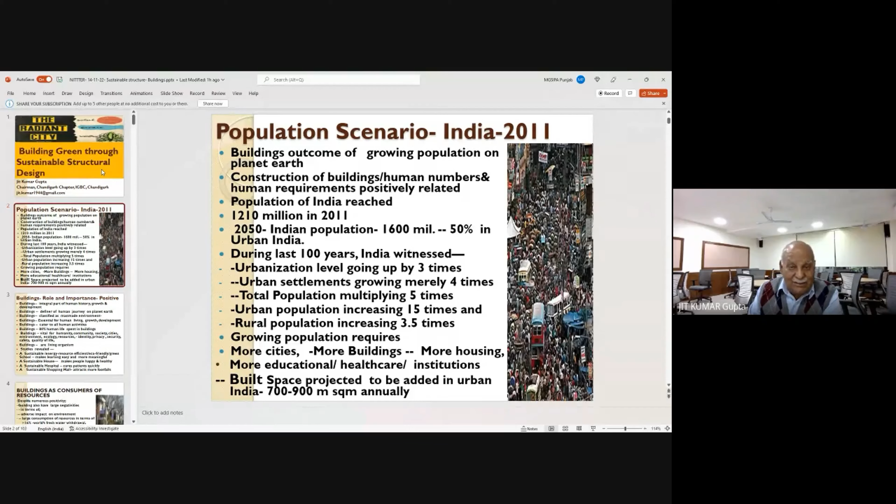But I think we have to understand, before I go back to the buildings, we have to understand the context of the building. So please understand, buildings are different. Buildings are distinct, buildings are universal, and buildings have a lot of impact and implication for human beings.

The day we came on this planet Earth, about 5 lakh years ago, the first thing we did was start searching for our shelter. So the kind of buildings have changed over a period of time with our requirements, with our technical know-how, with our knowledge of material, with our technology of construction, and our changing needs of living, working, and other measures which we are required to take.

So if you see our history, you are defined by the building itself. All the civilizations which came on this earth - Indus Valley civilization, Greek civilization - they are all being defined by building. Tomorrow, when the next generation looks back at history, they will all be looking at how we were living, and they will all be defined by the building. So buildings remain very critical for human living, growth and development.

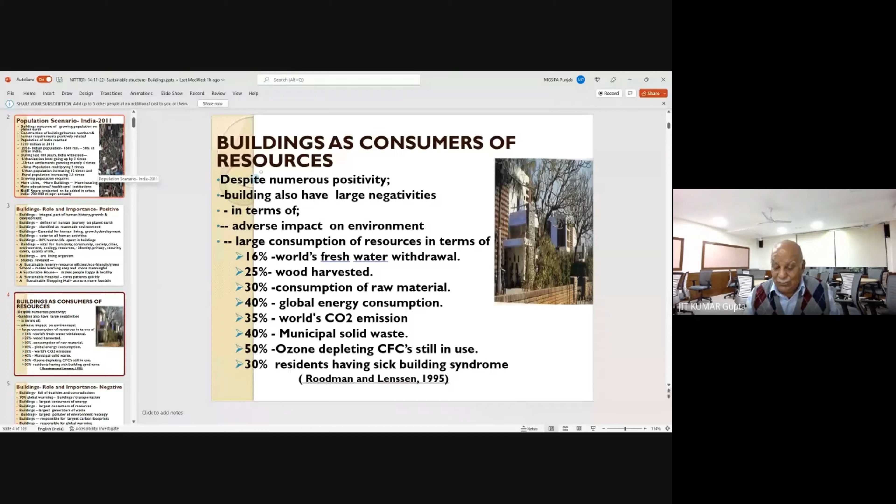They are suffering from the phenomenon of sick building syndrome. What is sick building syndrome? Buildings make you sick, buildings make you healthy - provided if you are living in a bad building, a badly designed building, without air, light and ventilation, and all kinds of problems like bacteria, you become sick. But if you have proper lighting, ventilation, and indoor air quality where the carbon emissions are the lowest, you surely are in a better kind of environment.

So you will be happy and healthy.

When we cumulatively analyze the building, from those two slides you can make out buildings are full of dualities and contradictions. 70% of global warming can be attributed to buildings and transportation. Buildings remain the larger consumer of energy and resources, generator of waste, and polluter of environment and ecology, and they generate carbon footprints. If you're heading for a problem of global warming, one of the major contributors remains the building itself.

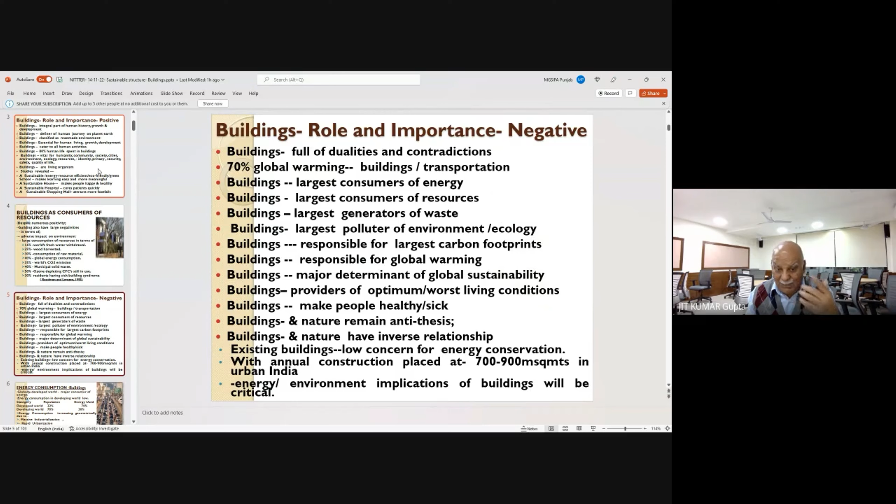Buildings remain relevant for human living. They can make you sick and make you healthy. But please understand, I'm repeating, building and nature remain antithesis to one another. So all building is an act against nature. I think our role and responsibility shall be how to minimize those conflicts. What conflict am I referring to? They consume lots of water, wood, raw material, energy, and they emit this. If you can minimize these things, I think you have done your job.

When you look at energy consumption globally, a majority of energy is consumed by the developed world. A Chinese person consumes 3.5 times more energy than us. An American consumes 11 times more energy, and as Indians, we have also started consuming large energy. They say energy consumption is an indication of the prosperity, growth, and development of a nation, and the reason for this energy consumption shall be industrialization, urbanization, prosperity, and globalization.

But I tell you, energy shall remain the motive force. Energy will be required, energy will be essential. You cannot cut down the energy. Energy need will be rising. But the problem will be what energy you use.

So energy has a color. You have black energy and you have green energy. Black energy is any energy generated by thermal plants where you are burning coal. You're generating carbon dioxide, you're transporting coal all the time. Around 60% of the total energy in India is generated by thermal plants, burning coal away. Thousands of tons of coal are burnt every minute, and when you burn coal, surely you are emitting carbon dioxide. But the question remains—I'm not saying you stop or the world will stop using energy.

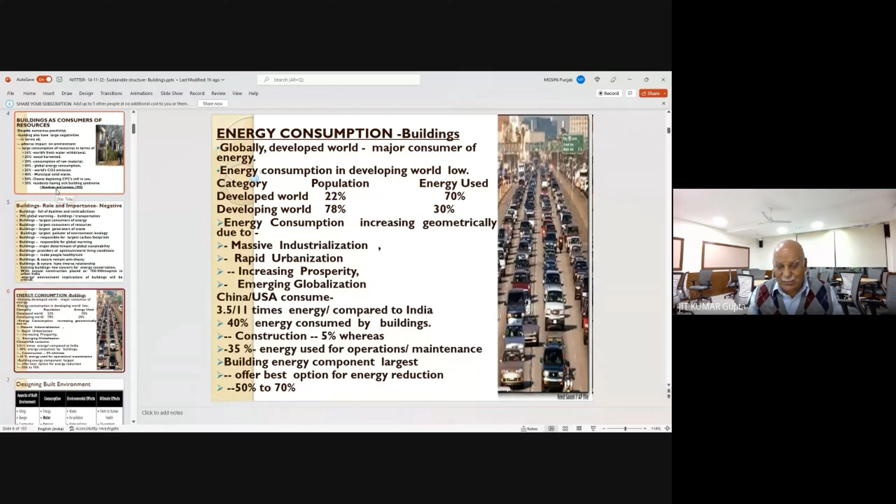So whenever you have a problem, please don't go out and look outside. Wherever there is a problem, the solution lies there itself. If buildings are consumers of energy, buildings can be made more energy efficient. So building remains the focus, and therefore buildings offer the best option for how we can reduce energy consumption.

When I look cumulatively at the context of the building, you can define the total life cycle of a building into 7 stages—that's siting, design, construction, operation, maintenance, renovation, deconstruction, and reconstruction, that's the 8th one. During this entire cycle, what do buildings do? They consume energy, water, material, and natural resources. Ultimately, they generate waste, pollute air, water, indoor air, create heat islands, and there's flooding and noise.

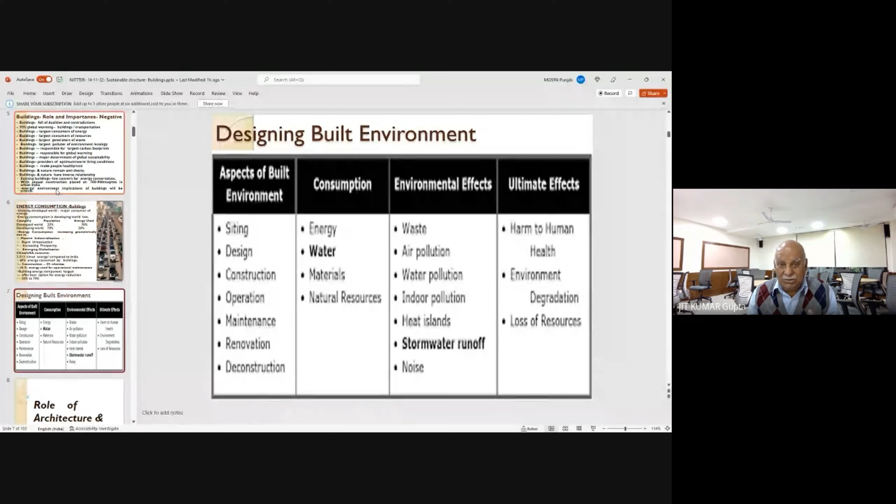Ultimately, what is the impact? They are harming human health, they are degrading the environment, and wasting a lot of resources. So you can think of this as the building—what they consume and what their implications are on the environmental effect.

So we look at who are the major actors in the building itself - building construction, building designing, building operation and building maintenance, so we focus on that. When I said if the building life cycle remain eightfold, there are two major actors: architects, structural engineers, civil engineers, and their service providers. All of them are very vital. Of course there is an owner, a person who is using it, they are there too, but surely for creation of the building, we are the people who are actively involved.

When we look at the entire context of building, I would draw your attention to the man Vitruvius. He was a Roman, he was an engineer. He is known as the father of architecture because he was the first man to write a treatise in architecture, identifying what the characteristics of a good building should be. And he gave the 3 characters: Firmitas, Utilitas, and Venustas.

Firmitas means building should be structurally stable - look at this, this is the job of engineering. Utilitas, building to be used for occupant, owner, and community - this involves both architecture and engineering. And then building should be aesthetically pleasing, beautiful to look at - that is Venustas. So beauty, utility, and structure - he defined there are 3 components of a good building, and all buildings should be designed with these 3 parameters in mind. That was defined more than 2,000 years ago by this gentleman, Vitruvius, who is called the father of architecture.

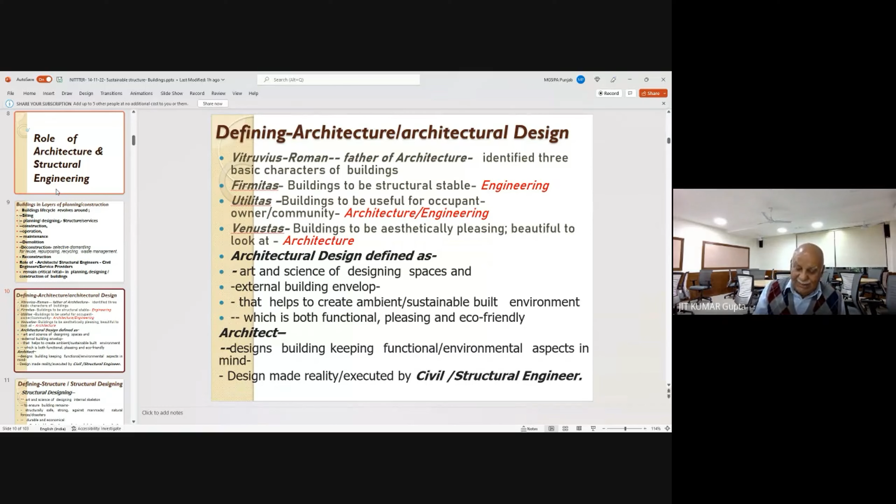But this concept on the paper, when it is transformed into reality, who will do it? It's only the structural engineer and the civil engineer. Let me also define it - I know you are more knowledgeable about structural design, but nevertheless, for my education, I would also like to define what structural engineer is. This is defined differently and distinctly. As architecture was the art and science of defining spaces considering the utility, aesthetic, environment, and function for which the building was designed,

But the question remains, are you looking at the durability? Are you looking at resources? Are you looking at the economy of the building? Because you have to make sure buildings consume energy, and the factor of safety will determine whether these buildings are economical. Of course they will become durable, but all structural design has to be between two limits - that means you achieve this desired level of safety, Firmitas, to the building, but make sure the building remains most economical.

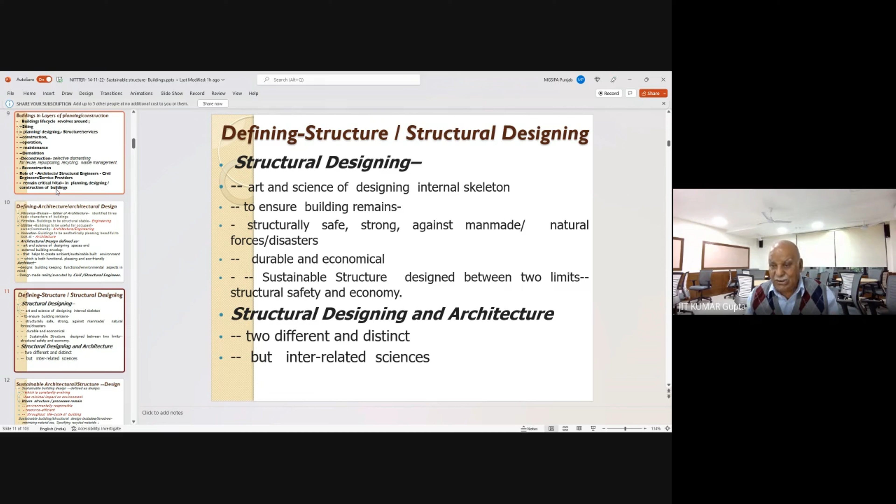Please understand, structural designing is not subservient to architecture. In fact, structural designing remains one of the partners, collaborator, and advisor to the architect, to make sure whatever building is designed is sustainable, more livable, economical, consuming the least amount of energy and resources, and surely has the required level of safety for the people living there.

So ultimately, when we cumulatively look at what is a sustainable building design, please understand there cannot be a universal building design. It will be all evolving, devolving. Structure can never be static. Structure is always evolving and devolving. You have seen how structures have changed over a period of time because of technology, because of material.

The construction technology and methodology of construction have all redefined the building, the design, the structure, etc. So structure in sustainable building design will not be universal, meaning you can't have a prototype of this. You will have the same principle guiding the designing, but they will be contextual to the area, the climate, the place where they are located, the wind direction, landscaping. There are so many other factors, the materials available, the technology being used. I think they have all been relevant, and that's what sustainable building design is — it shall never be static or fixed.

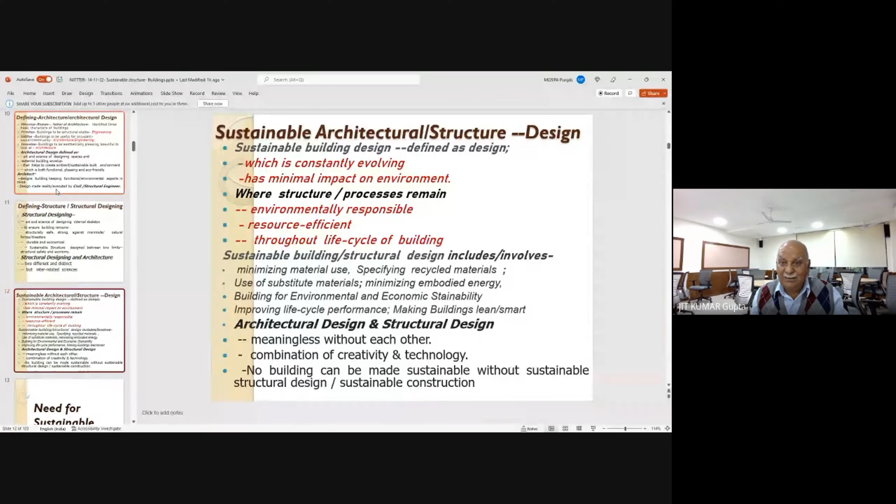If we are aiming at sustainable buildings and design, I think the structural engineer has to do its job. Even if the architect stresses that he wants a building sustainable, if the structural engineer does not address that issue, the building will never achieve the concept of sustainability. So they both remain relevant and meaningful. Sustainable architectural design will combine creativity and technology, and both have to work together to make a sustainable building a reality through structural design.

So let's look back at why sustainable buildings are relevant, and what is the need of sustainable structural design. We said 40% of global carbon emissions and 36% of energy used globally can be attributed to the way buildings are planned, designed, constructed, and operated.

Structural engineers and practices have a role in making a building sustainable, because buildings have impact on environment, ecology, and resources, and they generate a lot of waste. When a large number of buildings are constructed, the implication on resources and waste will be very high, and the impact on climate will be very large.

But the building typology has been changing very rapidly. Earlier buildings were low rise, now they are high rise. Earlier buildings had small spans, now spans are very large. Earlier buildings were very small, now they are very large. This changing typology has been possible because of three things: steel, the elevator which makes you move, and glass, which has helped make these buildings a reality.

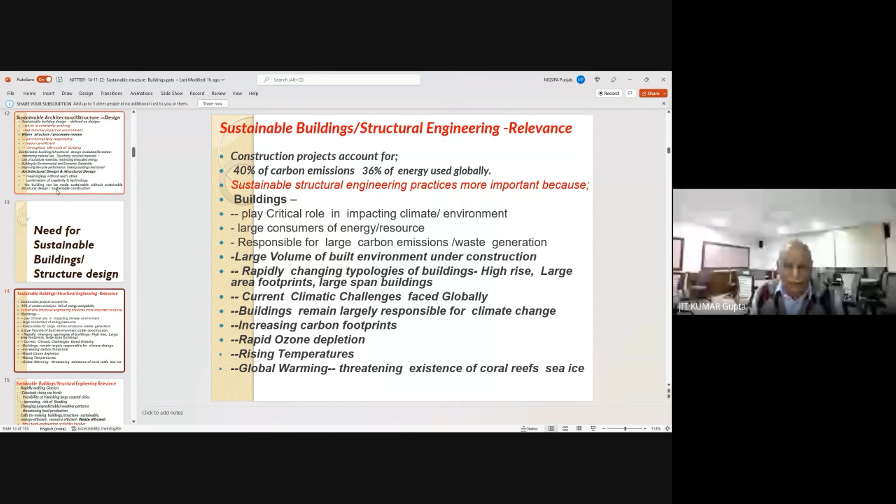Acting on a building, first and foremost you should understand we are destroying, we are converting the natural environment into man-made environment. So a number of wildlife habitats get destroyed.

Building during construction consumes a lot of energy. You are using heavy machinery, burning many things to produce materials, using construction materials which are manufactured through processes. And it's not only during construction, but the building, as a machine, will continue to use energy in its entire life cycle during operation, maintenance, etc. This has implications, and the structural engineer has to address these issues.

When we look at buildings, you have rightly said that the context has been changing. If somebody comes to you and says please design or construct my building, he will always demand three things from you.

Number one, he would say please take minimum time to construct my building. Number two, the quality of the building should be highest. Thirdly, while taking minimum time and ensuring very high quality, please make sure the cost should be less. So cost, quality, and time become the three parameters.

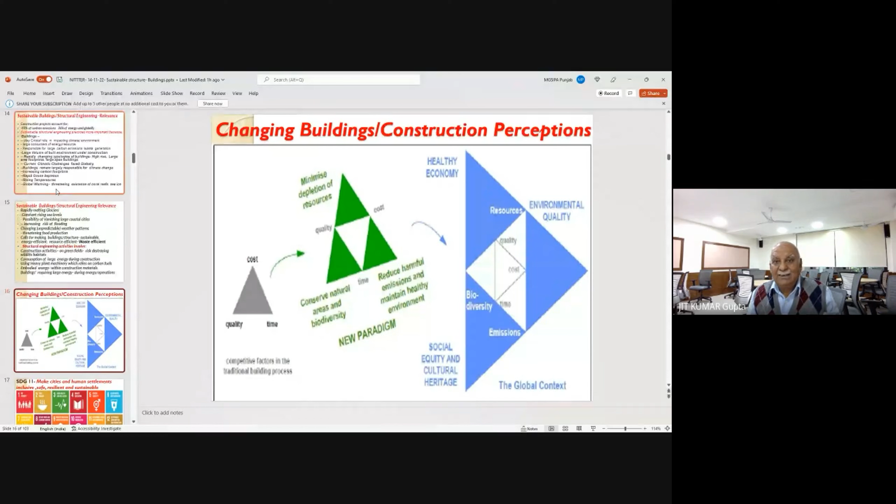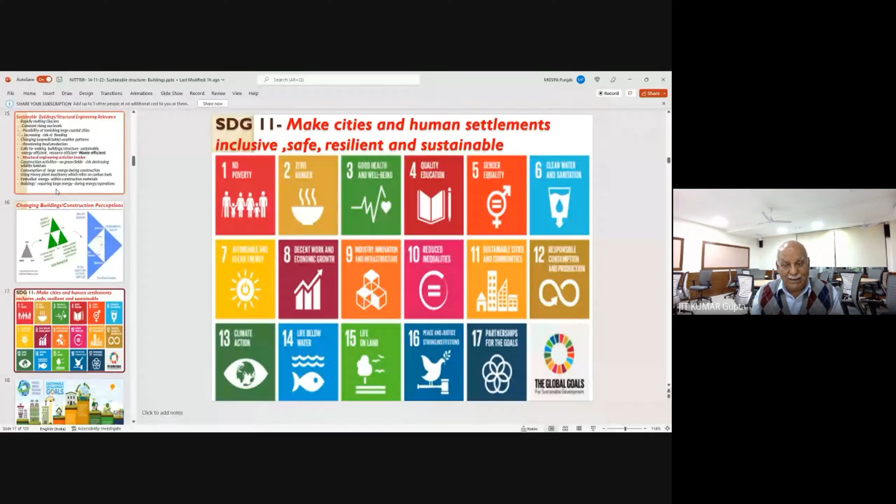Buildings are relevant for global warming and need to be addressed and planned for accordingly. So buildings are now looked at differently, not merely in terms of cost, quality, and time. This is what the UN's 17 goals say, and Goal 11 clearly says that you have to make cities and human settlements inclusive, safe, resilient, and sustainable. They say buildings must be not only energy efficient, but also zero energy, and ultimately the aim is energy positive buildings. That is the context.

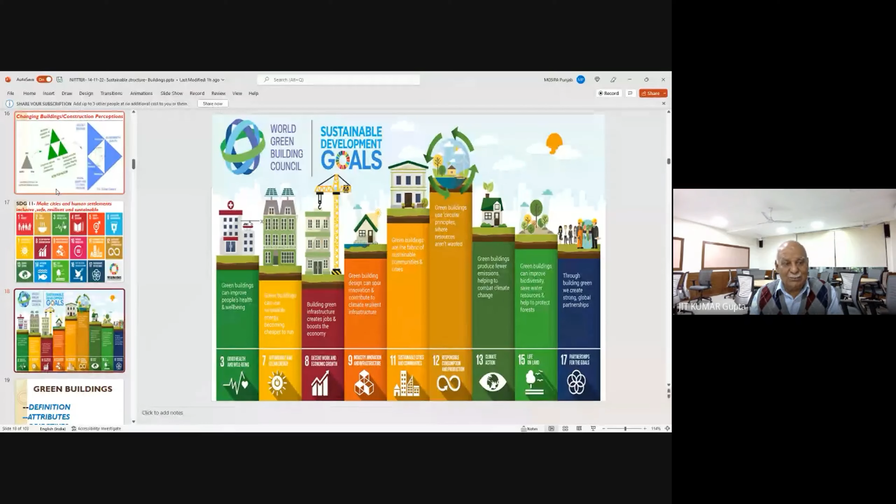Therefore, if you have green buildings or sustainable buildings, out of the 17 goals, you are able to address 9 goals itself. But let me first explain to you what the green building context is, and we can see how they are relevant to the structural engineer.

A green building is one which, in its design, construction, and operation—please understand there are three stages of building: design, construction, and operation—does what the Green Building Council definition says: it reduces and eliminates the negative impact and creates positive impact on our environment, nature, and natural environment. So please understand, across the entire life cycle of the building—designing, construction, and operation—its job is to eliminate all negative effects the building has on our climate and environment, and create positive impact by enhancing and adding value to preserving our climate and natural environment. So this context is about looking at the climate and the natural environment, and that's the domain of our designing and construction.

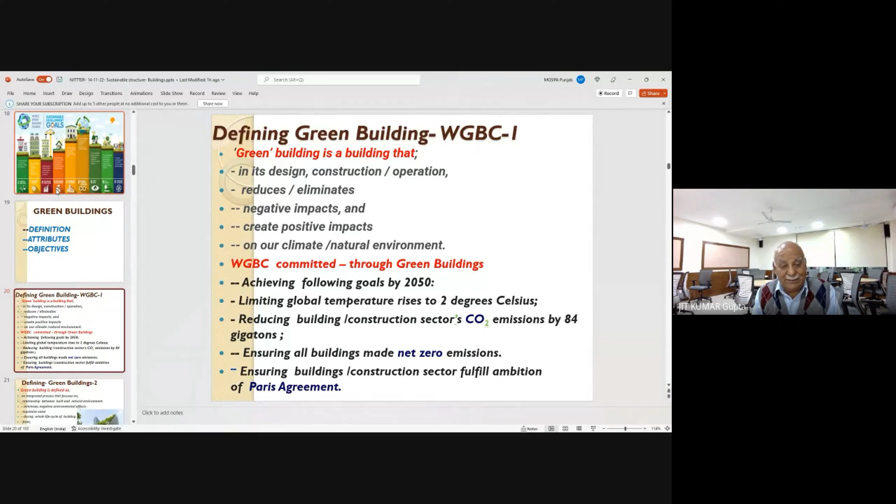The Green Building Council says that through green buildings, we'll be able to achieve the sustainable development goals by 2050—limiting temperature rise to 2 degrees Celsius and reducing carbon emissions by 84 gigatons. You can think of the role and importance of this: we will make all buildings zero emission, and we will make sure the building and construction sector cumulatively helps in achieving the objective of the Paris Agreement, that is, making this world sustainable.

Green building has also been defined by another organization, in terms of an integrated process—the entire process of green building. Again, the focus is on the relationship between the built and natural environment. The focus of the project is looking at what building you are creating and what its role and relation with the natural environment shall be. You are minimizing negative environmental effects and maximizing value, looking at the entire life cycle of the building: design, construction, operation and maintenance, renovation and demolition.

Basically, across all these stages, buildings reduce the negativity caused by the building and promote its positivity. This is one definition which looks much simpler and more focused: a green building must have five characteristics.

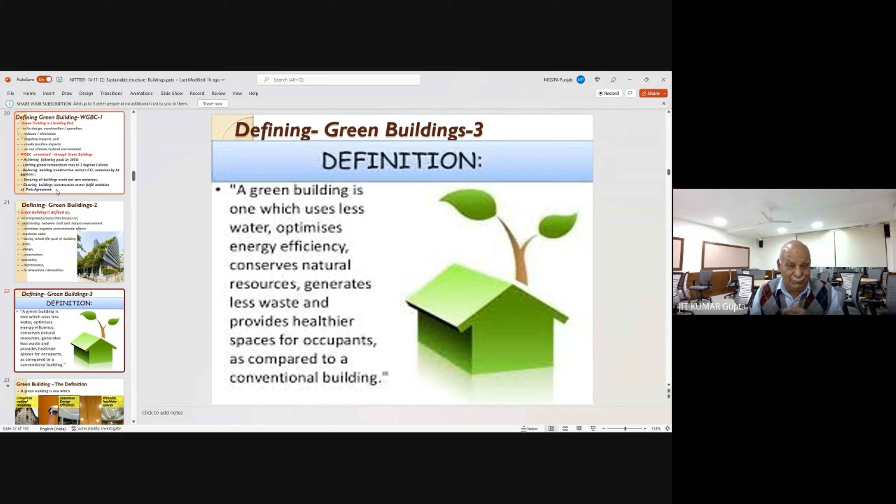First, it reduces consumption of water—meaning you use less water when constructing or operating the building. You are optimizing energy efficiency. So, water and energy—you are conserving natural resources, meaning you minimize the use of natural resources. You generate less waste and provide a higher, healthier space for occupants compared to a conventional building. So energy, water, resources, waste, and indoor air—the air you breathe within the building—those are the five parameters.

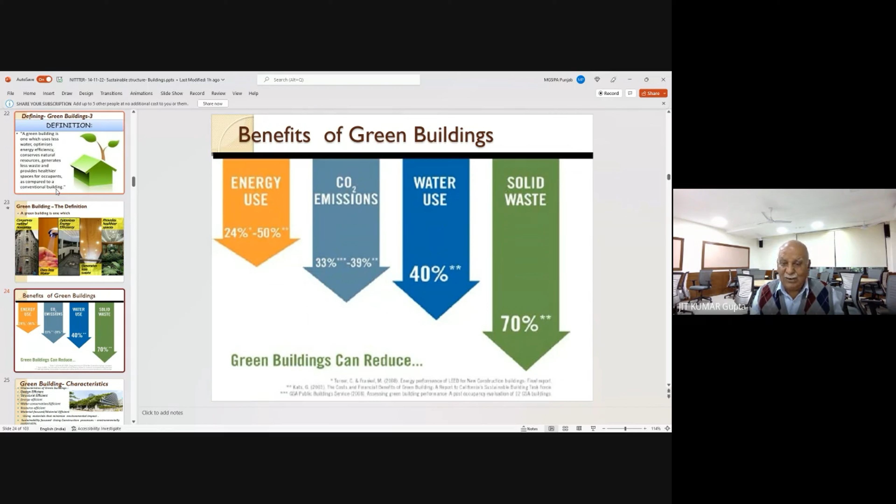This is what has been explained: you try to conserve these, and as a result you reduce energy consumption. You can reduce energy up to 50%, carbon emission up to 39%, water up to 40%, and solid waste up to 70%.

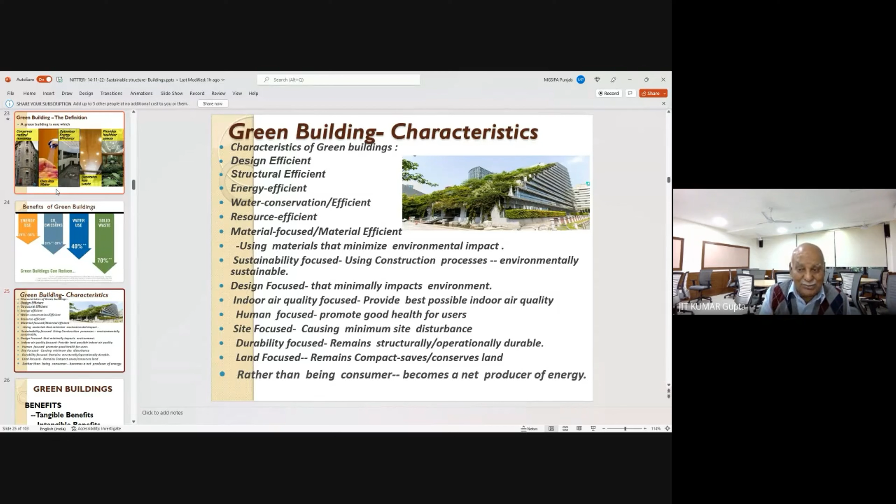Rather than being a consumer, a building should be a net contributor or producer of energy. Accordingly, when you are reducing consumption, you are saving water and energy, and surely paying lesser bills. Your cost of operation goes down, but in addition, you are contributing to the environment because there is less temperature rise, less air conditioning needed, and you are making the people living there happy and healthy.

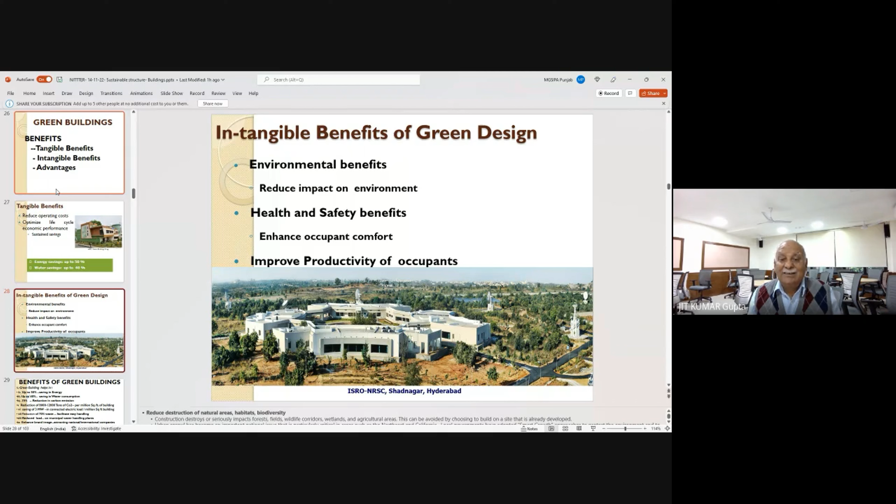And once people are happy and healthy, surely they contribute to productivity. This has been proven: the cognitive score of people living in green buildings in America is around 102. They contribute 8% more profit. They have less attrition rate, meaning people don't want to leave the green building where they work, and they sleep 42 minutes more than in a normal building.

So these are the benefits, but let me quantify it. If you have 1 million square feet of built space, with green building you will save 8,000 to 12,000 tons of carbon footprint annually. And once your electricity load goes down, that means 3 megawatts of connected load will go down for every million square feet.

Energy saved is energy produced. Whatever you reduce, you have cut down total consumption, conserved those resources, and made it possible for them to be utilized over a longer period of time. So what you are doing is reducing 70% of waste - that means the land needed, the hillocks of garbage created, plus the number of vehicles and manpower involved will always be less.

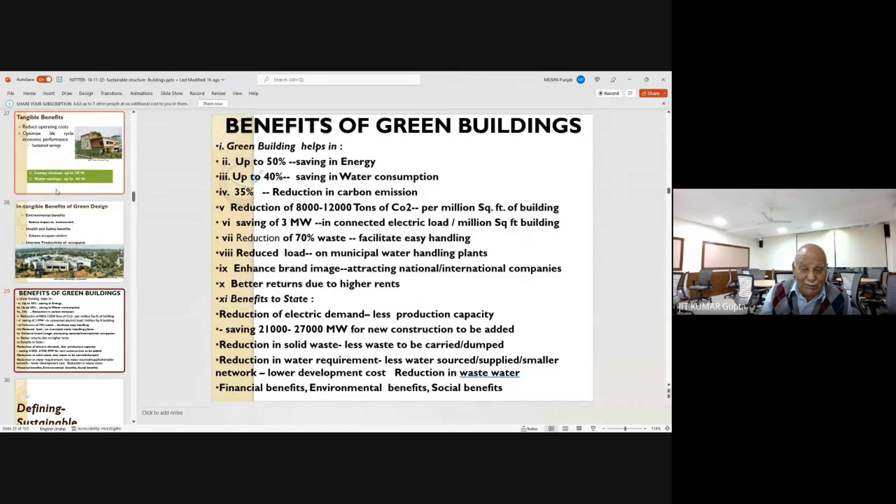If you consume less water, you have a smaller network of pipes for supplying water, and accordingly, waste water generated, which is 80%, will be less. That means you will have reduced sewerage pipes, and your STP will also require less capacity to deal with it. So it's a win-win situation, both for government, for people, and for the owners of buildings.

This helps with financial benefit, environmental benefit, and social benefit.

So I request you - so after we have done this, let me, after architecture... hello.

I will now define sustainable structural engineering. Once we are talking of sustainable architectural design, how does sustainable structural design help architects? In fact, the broad objectives of buildings are achieved through structure, because you are minimizing environmental pollution. You are making structure supportive of the environment. You are conserving the environment before, during, and after the building is constructed. You are making sure the building design and structure remain energy efficient, with lesser embodied energy.

They require less operation and maintenance energy. You are using recycled, renewable material, improving the durability of the structural system, and reducing the on-site waste.

Green buildings require less operating cost and are more cost effective. A study done in the USA looked at the role and responsibility of the structural engineer and construction engineer. It said that if you have sustainable structure and use technology which helps promote sustainable structure construction, you could save $400 billion in global spending on energy specification itself. So that is the saving.

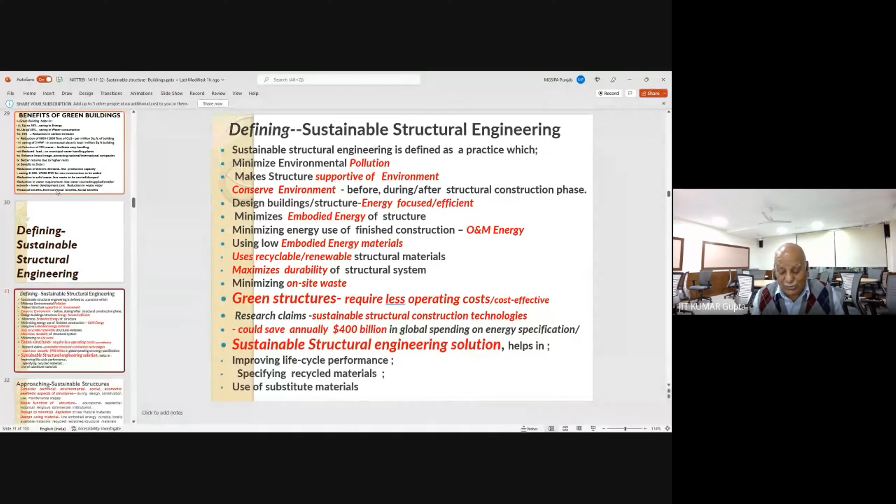So when you are doing sustainable structure design, what do you keep in mind? Number one, during design, construction, and maintenance, you look at the environmental, social, economic, and aesthetic aspects of the structure. You know what the building is being constructed for - whether education, residential, commercial, or institutional. Then you consider what raw materials are being used.

Your design will be based on what you know, looking at technical issues of environment, social, and economic aspects. You will look at the function and design with minimum material. You will use material which has low energy in production, which is durable, locally available, from recycled sources, and used in its natural form.

You try to minimize the use of steel and concrete because they are large consumers of energy, and you try to have substitutes. Maybe tomorrow you'll have a substitute for steel which is low energy, or a pattern of concrete which is low energy composite. That's what innovation, research and development should be, to make the structure more sustainable.

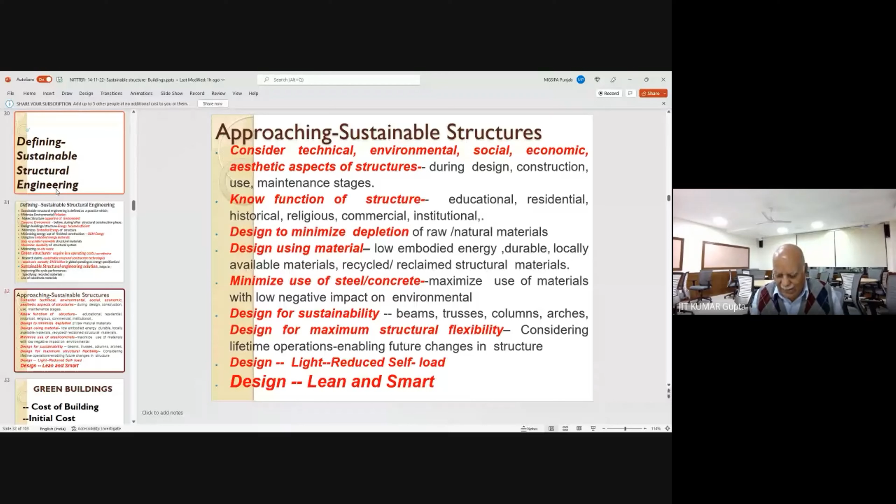Your design should reduce the self load of the building, because there are two loads, self load and live load. If you make the building less in self load, you are saving on the structure. You might like to make your building lean and smart, meaning thinner walls, thinner beams, more space for utility within the same built area, and that helps make the building and structure sustainable.

So when you are looking at green building, sustainable structure, and the entire context of building, don't look at the initial cost, look at the life cycle cost, because the building is going to be there for many years. So in fact, you are not having cost-effective building, you are having cost-effective living.

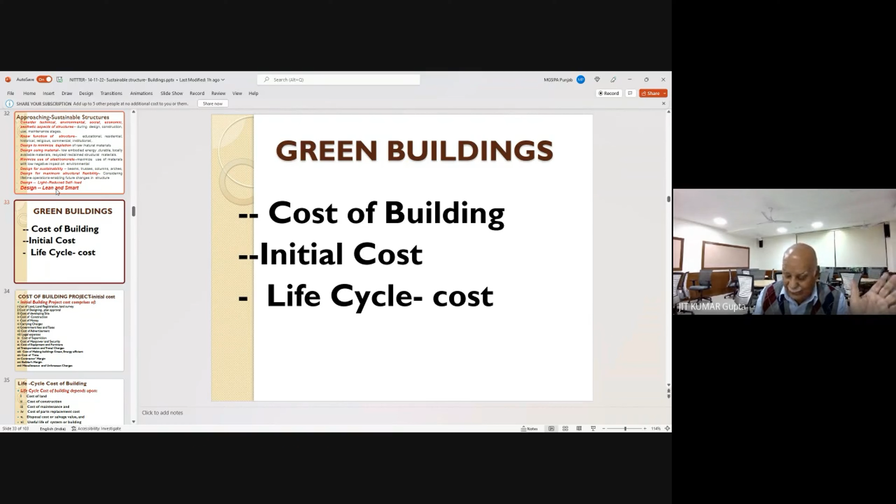The building should contribute to lesser cost on water, waste, and energy, and provide you a happy and healthy life. So please, whenever you do a project, don't look only at initial cost. Look at the life cycle cost, because initial cost is what goes into making the building itself, and life cycle cost is the initial cost plus operation and maintenance cost.

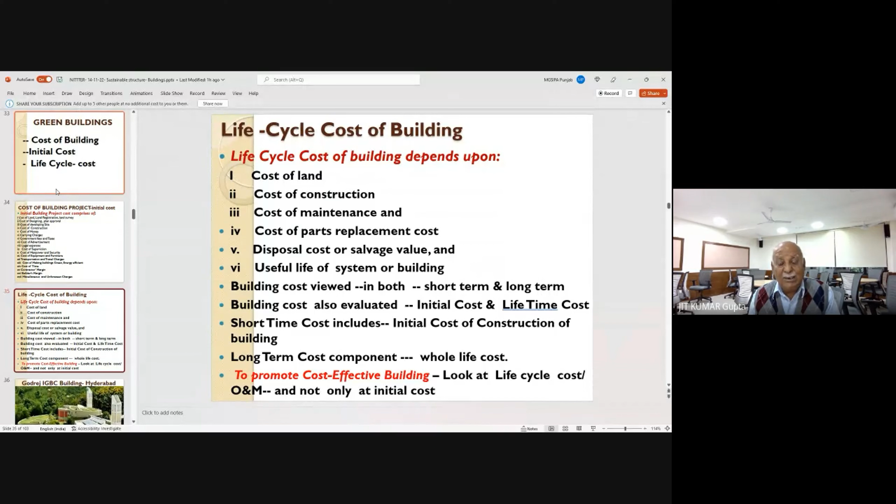The initial cost is a short term vision, looking at the cost of building, whereas life cycle cost is the long term cost of the building. Please understand that buildings have to be cost effective, not only initially. Maybe initially you can afford to spend 2 to 3% more, if it contributes to lowering the life cycle cost of the building.

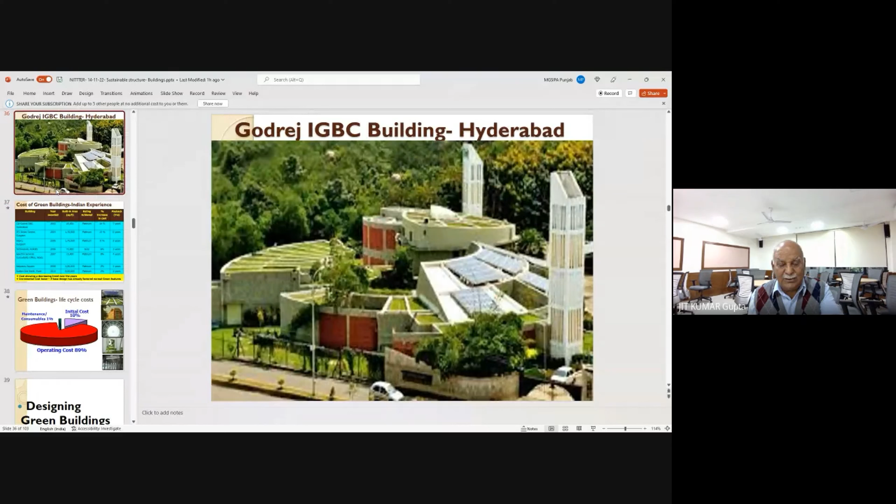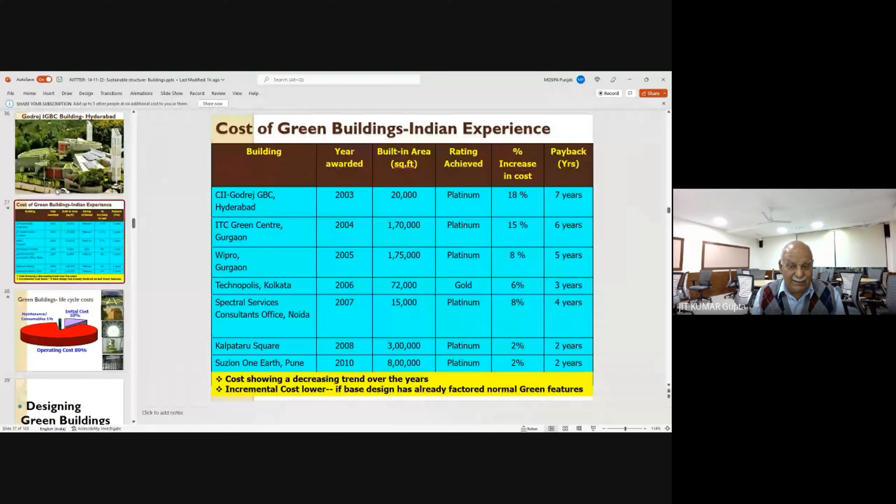This building was the first platinum-rated building constructed outside America. This led to 18% higher cost, but this cost has been recovered. Over a period of time, looking at Suzlon One Earth, which has 8 lakh square feet of built space, platinum rated, it cost 2% more, and the excess cost was recovered in 2 years, with the rest of the time the building was saving. So over time, the cost of constructing a green building has been going lower, provided your design involves all these features itself.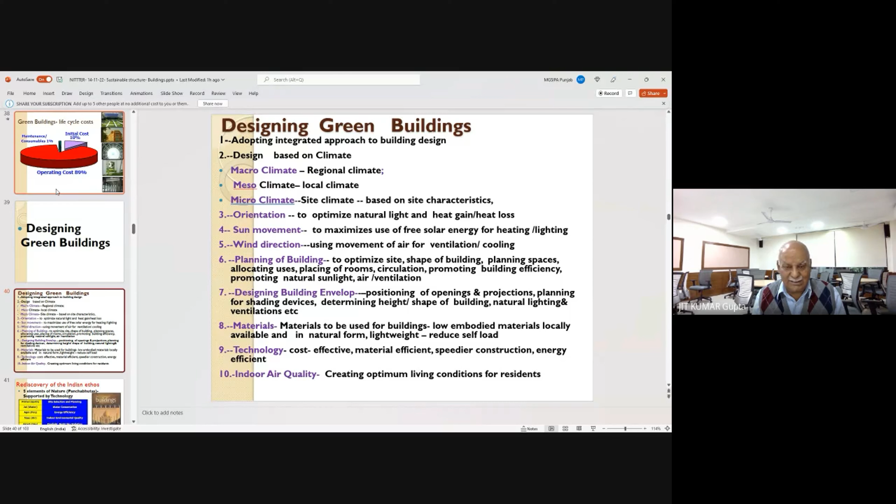When you look at the design of a green building, which is the domain of engineers and architects, it is based on climate, orientation, sun movement, wind direction, and then space placement, the building envelope, material and technology, and indoor air quality — they cumulatively make a green building. These components address the specialization of an architect and engineer, who prepares the planning and design of the building, but ultimately it's the material, technology, and other factors, along with how the building is constructed and operated, that determine indoor air quality.

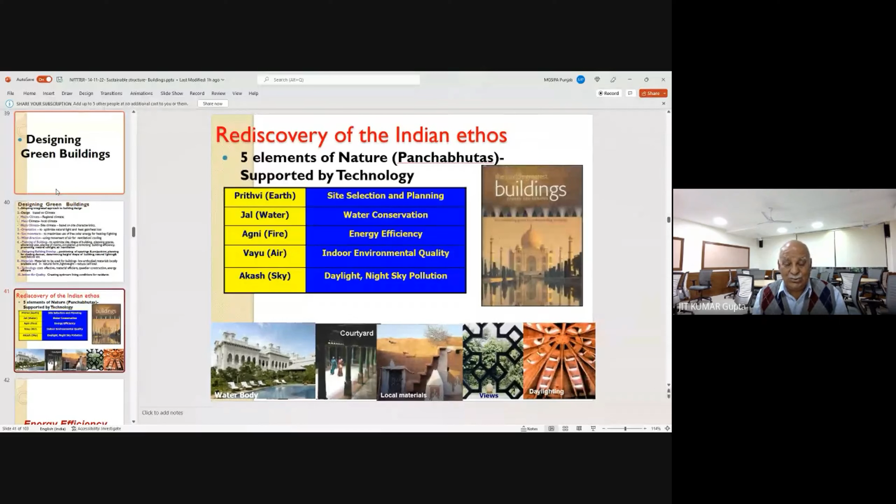A green building is nothing but building with nature, using nature and natural elements — Prithvi, Jal, Agni, Vayu, and Akash. These are the 5 elements that go into making a building.

When you look at the energy component, the total energy consumed in the construction of a building is divided into two parts: one is embodied energy, the energy which goes into making of a building, and then operation and maintenance of the building. So 10% of energy goes into maintenance, and 74% is operation.

You can see that 16% of the energy is embodied energy. So how can you reduce embodied energy? You use materials which have lesser energy used in the construction of the building. All natural materials will have lesser embodied energy, while all processed materials made in a factory will have higher embodied energy. So we will see how this energy can be minimized, to ultimately make sure the building has lesser energy.

I'll explain embodied energy: if you are using material from outside, you are extracting material, processing it, transporting it, and then installing it. Operation energy is the energy used during occupation — heating, lighting, air conditioning, ventilation, all this kind of energy being used. Maintenance, when you change things, addition and alteration, also consumes energy.

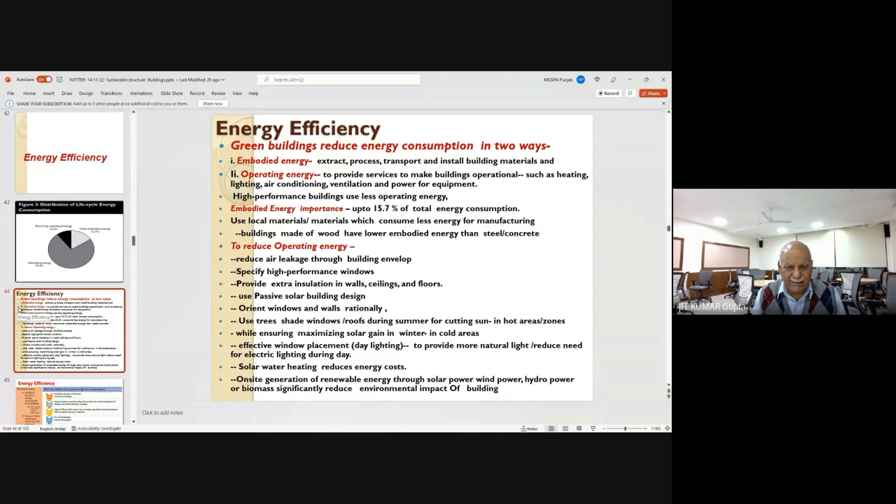A high performance building will not only reduce embodied energy, but also look at how to reduce operation energy. Buildings gain and lose heat because of air leakage from doors and windows, etc. Then you specify high performance windows. In buildings you have conduction, convection, and radiation — this is how heat is lost and gained by a building. The building envelope — the walls, roof, and windows — are the major culprits where building heat is lost, so you have to make sure they are properly taken care of.

So what are we trying to say? Number one, we are trying to make sure that we are not using black energy. Secondly, we are making sure that buildings use their own production of energy so that they remain relevant and are meeting their own needs.

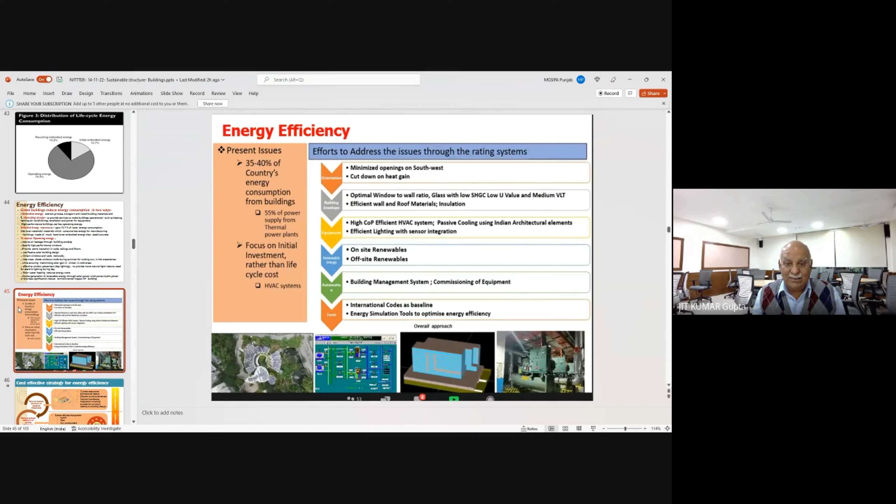When you design an energy efficient building, the first thing is your design must be led by a passive approach, meaning you are reducing consumption. If your design goes wrong — if you are not designing with nature, sun, etc. — then we will never be able to do justice to sustainable building. You have to make buildings which are climate responsive, and your design should look at making the best use of daylighting. Sun brings two things: light and heat. So wherever you need both, bring them in; but if you need daylighting without the heat, you have to cut off the heat itself. You have to integrate your building with nature, and in nature there are two things.

One is the sun, other is the air. So therefore, make best use of this. Secondly, when you do this first thing, it doesn't cost anything because the design and architect is being paid for that, and has to do that job.

Secondly, you have a lot of things being used - computer, lighting, cooling, and everywhere you are using machinery. Please make sure our lights, fans and air conditioners are rated, efficient, and star rated, so that they consume minimum energy. Thirdly, whatever energy is used by the building should be compensated by photovoltaic cells, and that remains costly because you're generating electricity.

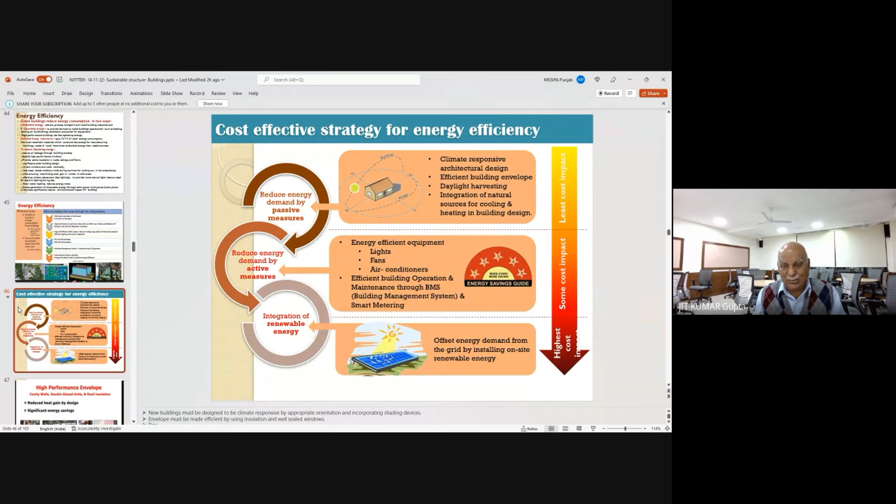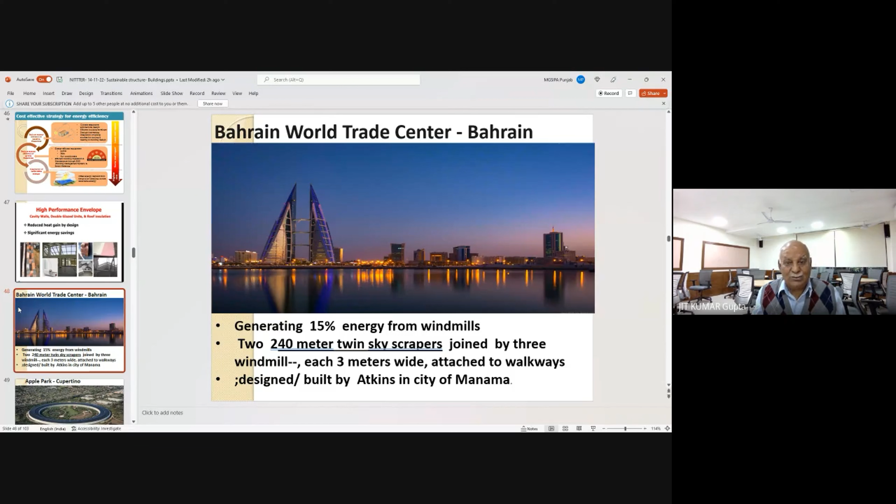So this is a high performance window. Look at this Bahrain trade center, where the structural engineer advised the architect: instead of one building, you should have two towers. These two towers are 240-meter twin skyscraper towers, joined with bridges. In those bridges, they have put dynamos, which are rotors - windmills. They cross the wind direction, so they are moving all the time, generating electricity 24/7, meeting 15% of the energy needs.

This is another building, done by Apple, called Cupertino. This is the headquarters of Apple - the watches you wear and the mobile you use - and it remains one of the most energy efficient. They have 17 megawatts of solar panels on the roof itself, which meets 75% of the energy. In addition, they use biofuel energy generated to meet the rest of the needs. So this building remains zero energy - it doesn't need any black energy itself.

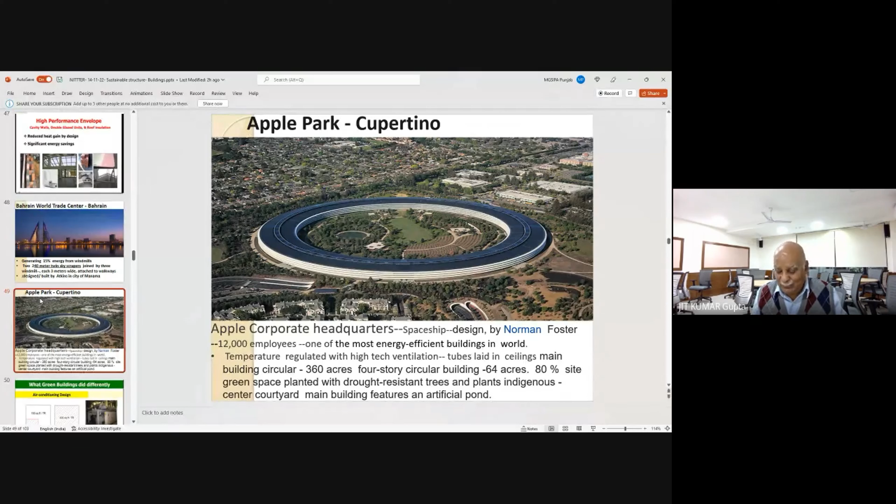They have 360 acres of total land. They wanted the building designed as a spaceship, and that building covers only 64 acres. It is 3 stories down, 4 stories up, and 80% of the site is now green, planted with trees which are local and indigenous. They have done a lot of innovation, and this remains one of the unique buildings.

When you have a green building, you will be able to address the air conditioning system whenever needed. Normally, 1 ton will do cooling of 150 square feet. In case of a green building, it will be 600 square feet, and it has been recently said that Microsoft has been able to cover 900 square feet of cooling by only 1 ton. This is the level of energy saving you can do.

How you do it in the design itself - I'm explaining that you have light coming in, but with light on the southern side, naturally the heat will come in. Instead of clear glass, they have put glass embedded with photovoltaic cells. These photovoltaic cells have small punctures which allow light to go through, but the heat is absorbed. So they are generating electricity. You can use the glass facade not only for bringing in light, but also to generate electricity.

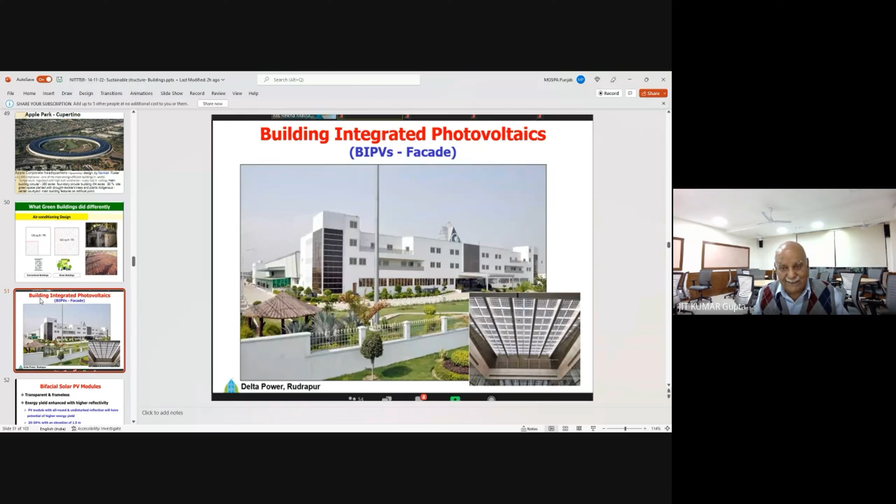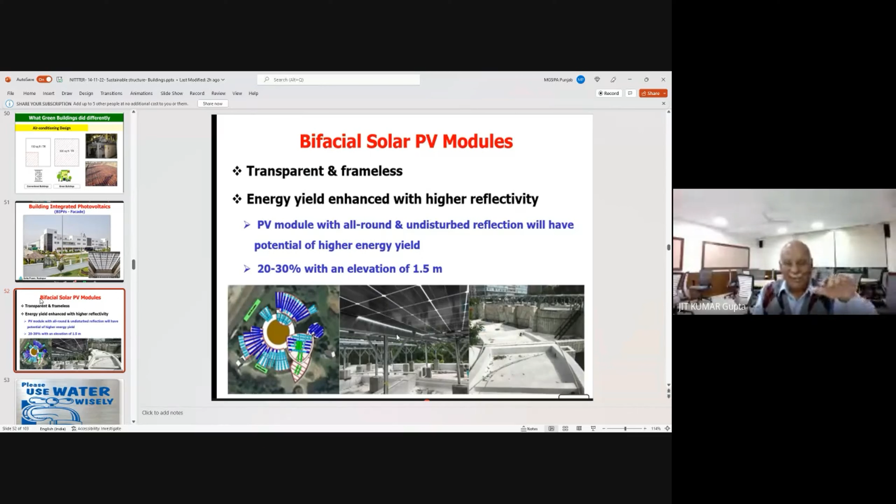And if you can do this on the western side too, that will be great. So now there are photovoltaic cells - earlier they were only on the facade generating electricity, but now there are bipolar, meaning bifacial, cells. Your upper face will also generate electricity, and the lower face too, because whatever sunlight falls directly is converted to electricity, and whatever is reflected from the ground is captured by the lower side. So you can have 20 to 30% more efficiency this way.

So that was the context of this building - how you can design and structure it to reduce energy consumption, and then change the color of the energy from black to green itself. Now come to water. Water remains very, very important, and a lot of water goes into making a building. Please, you all know recycle, reduce, and reuse, but you can also do refuse - a fourth one - so that you have minimum water consumption. Water is needed.

Water is the elixir of life. But water should not be treated as a commodity for sale or purchase. It's a gift of nature which needs to be preserved. India has only 4% of the world's water, but 17% of the population, and the largest animal population in the world. So India is already facing a water challenge. I think we need to value water.

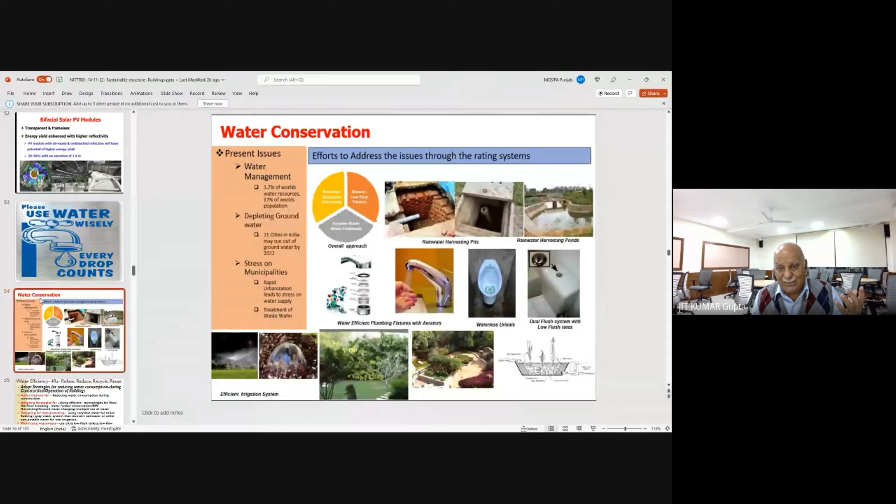Number one, we will minimize the consumption of water. Number two, we will see that rainwater is harvested. So ultimately, what is the option for you? If you are making a building water efficient, please see how you can minimize the use of water during construction. Someone should research how much water is consumed during construction of a building and how you can minimize it. I think that will be a great contribution to making the building more sustainable and water efficient. Then you have to use strategies.

That means you have to slow the flow. The only way to reduce water consumption is to break the water. How do you break the water? You mix air into it. So you don't use water once, you have multiple uses of water. Then you can use a dual plumbing system. You can recirculate the water. You need to meter the water, because we are all consuming water ruthlessly.

But we have to make sure that buildings don't consume too much water. Whatever WC you are putting in, the normal WC will have a cistern of 13 liters, but now we have 3 and 6 liter options. We are reducing consumption. You have waterless urinals. That's what you can do.

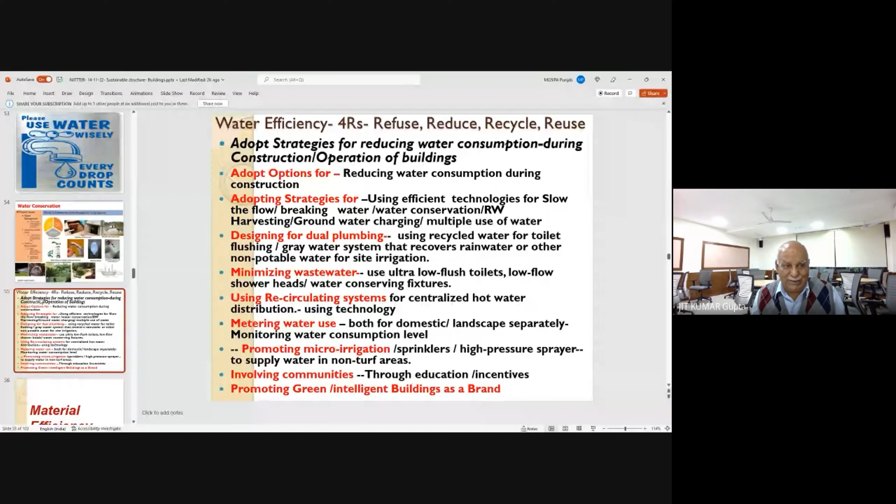And you have landscaping done in a manner that you don't have grass. You have local trees which consume less water because they are suited for that area. So don't go in for trees which are imported from outside, which have no relevance, and green spaces that consume a lot of water.

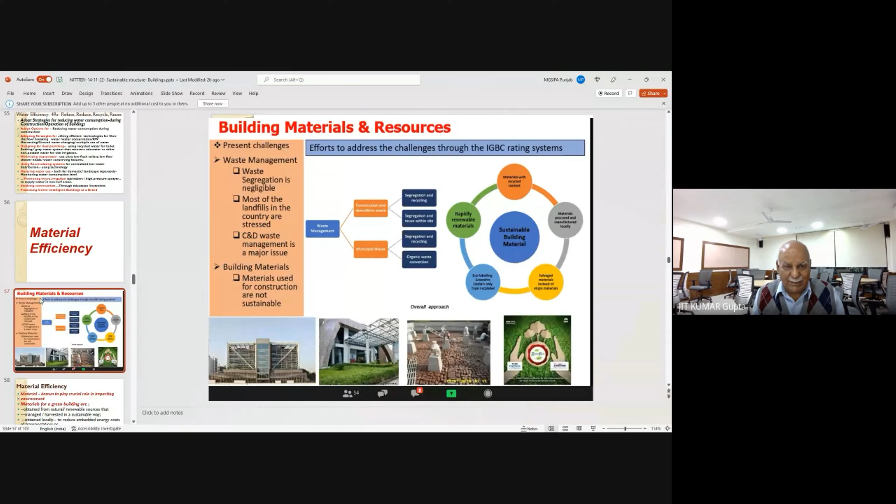So you have to make sure that your landscaping also does not consume water. Material remains very important too. We are all concerned about the challenge that majority of waste generated in cities comes from demolition of buildings. This waste never gets absorbed, it stays because it is not organic waste. So the challenge is waste management. We don't segregate the waste, we just transport it and fill low-lying areas, or dump it somewhere. So construction and demolition waste remains very critical.

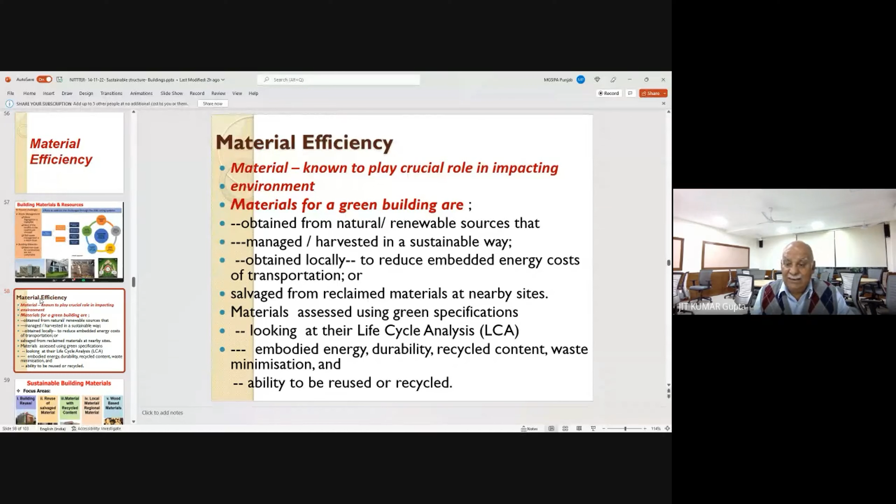And what material should you use? Number one, material which is obtained from nature, which is renewable, which is harnessed and harvested in a sustainable manner, which is locally available because you are not transporting material from far, material which has longer life and requires minimum maintenance and upkeep. And wherever it's machine-made material, use material that requires less energy in making it. And please try to reuse and recycle this.

So this is your order. I would suggest to all the students and teachers of engineering and architecture: retrofitting should be introduced, because buildings are being constructed, demolished, and reconstructed.

Whenever a student is given a job where an existing building is there, we say first demolish that building, we destroy the building. But I think now we have to look back as professionals involved in this field. We have to make sure that whenever the task is given and a building exists, you should be able to do a diagnostic analysis of that building, to see how it can be reused without much destruction and damage. So deconstruction should be included as a separate subject of study.

I think if you do this, engineering will be much more useful and will make a great contribution to sustainable building design. So first, if there is a building available, see how best you can use it. Secondly, if it can't be used, see what materials can be salvaged. Thirdly, material that has been destroyed, see how it can be recycled. Fourthly, use recycled material and local material which is available at that place.

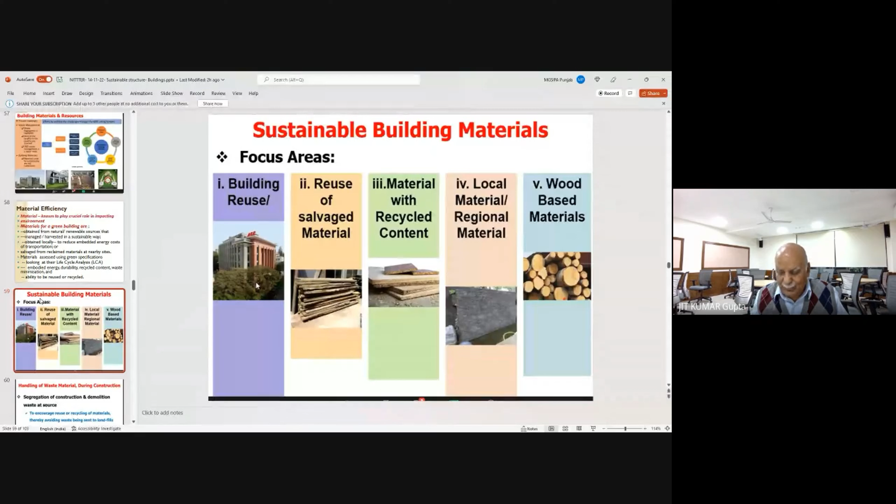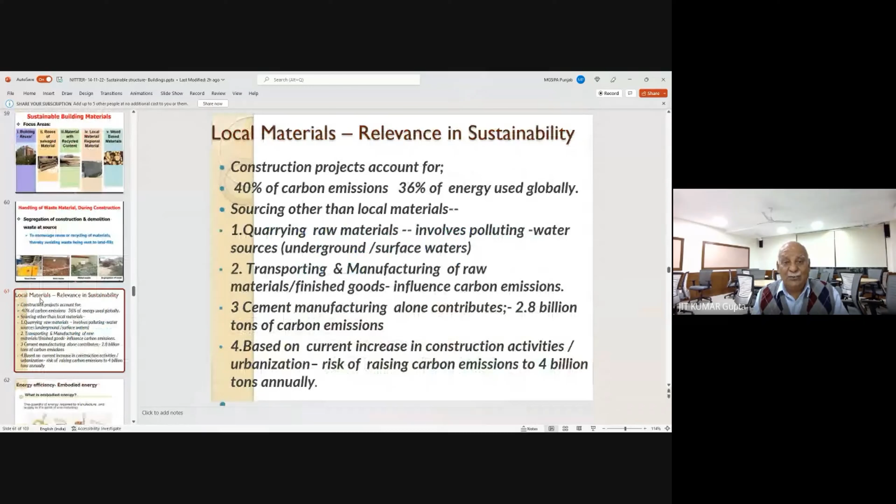Fifthly, you will use natural material, easy material. So segregation of construction and demolition waste at source shall remain vital for you. And we will call this embodied energy - you are extracting material, transporting, manufacturing, and then retransporting back. So please understand, material manufactured in factory should be used to a minimum extent. That's why we say use locally available material.

That doesn't mean you only use local material as is. You have research and development to improve the local material, make value addition, make it stronger, have different products which make the building a better place. And secondly, you do research in the existing construction technology used locally to make your structure more relevant.

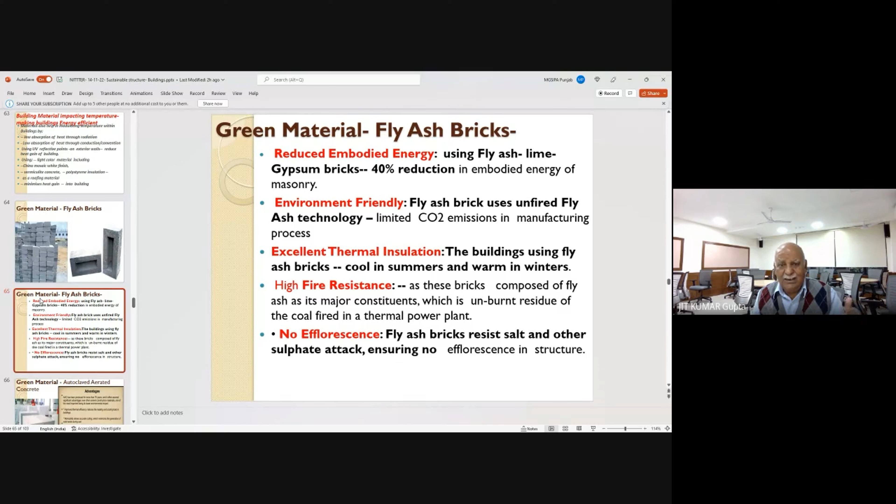So ultimately, fly ash brick is one which reduces embodied energy and is environment friendly. It has highest degree of thermal insulation. It is fire resistant and doesn't cause efflorescence.

Then you have aerated cement concrete. They are lightweight, they save labor, they reduce the self load. They are acoustic in nature. They don't allow heat loss and gain, and they are sustainable in seismic activity. They are finished - they don't require any other finishes. They can also be used in natural state.

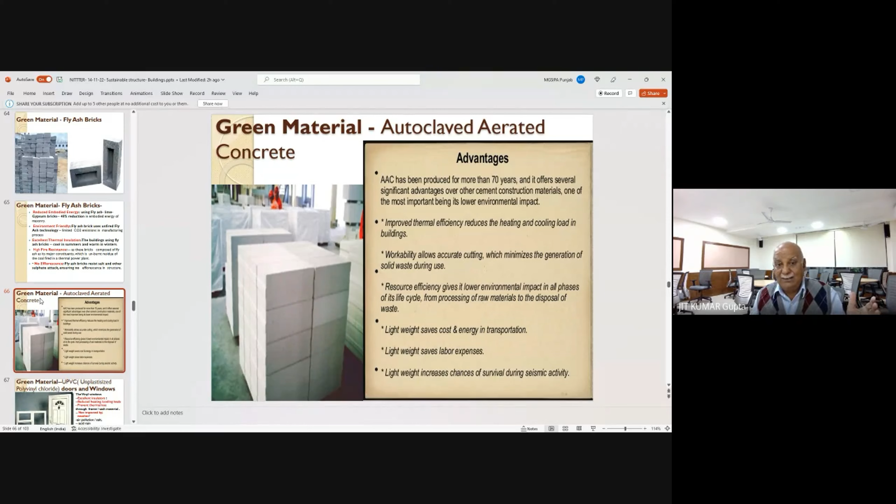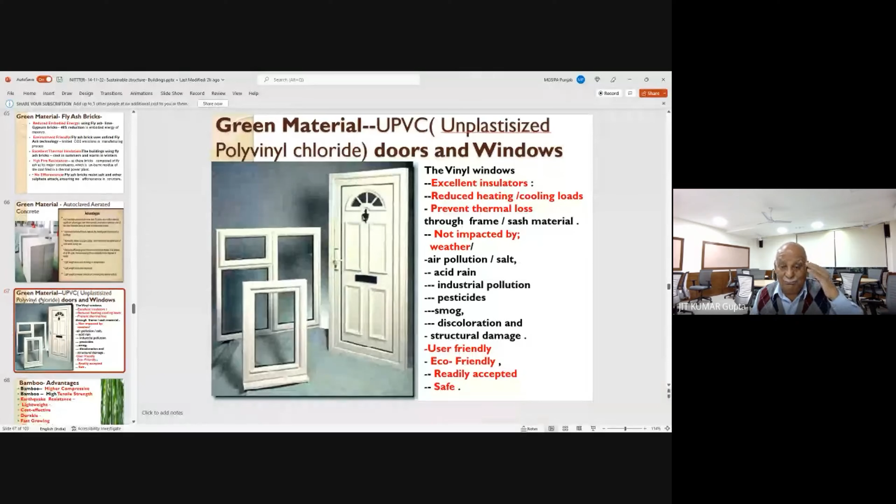UPVC windows are another option. Of course they are expensive, but they are user friendly, eco friendly. They have longer life and minimum requirement for maintenance and upkeep.

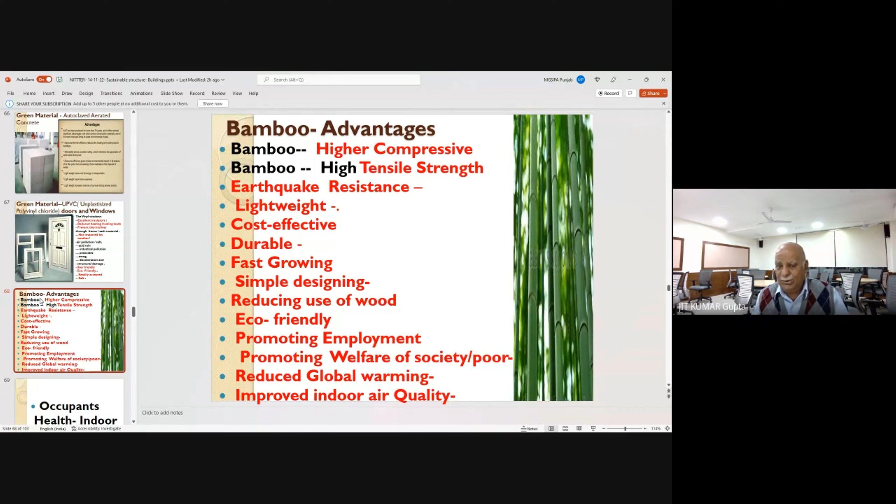And bamboo remains the steel of the 21st century. Bamboo has lot of hope because it has many inherent advantages, but bamboo has to be used with care and caution, after treatment itself. Bamboos ultimately, they call it a natural grass, naturally available, can be grown everywhere, and it's durable, cost effective, lightweight, with strength of both compressive and tensile strength, and it contributes to employment, and also sucking of carbon dioxide and improving indoor air quality.

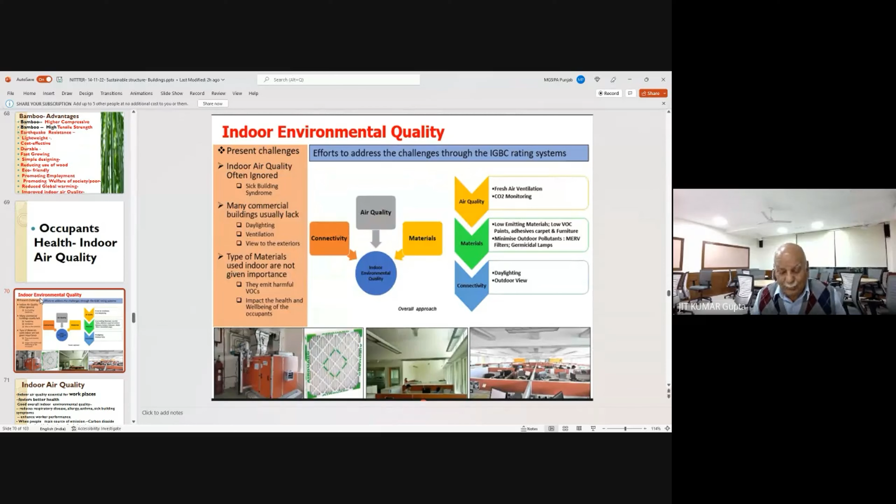Indoor air quality remains very important because we are living in an environment, and that will depend upon what material is used. In addition to daylighting, ventilation, and looking at exterior, the most important thing is indoor air quality, which makes you happy and healthy. So indoor air quality depends upon what material and what finishes you are using. So please make sure you don't use material or finishes which are chemical based. Otherwise what will happen - all the chemicals will dissolve into the air, and we will all be inhaling them.

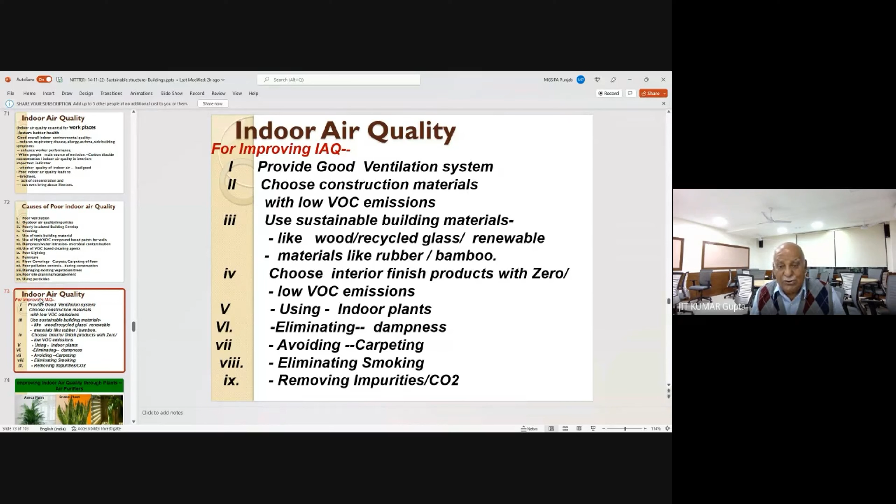So when improving indoor air quality, you have to have a good ventilation system. You have to choose construction material which has low VOC. You have to use sustainable building material like wood, recycled glass, renewable material like rubber and bamboo. You have to choose finished products which have zero or low VOC. Use indoor plants. You have to eliminate dampness. Never ever use carpeting, and you have to eliminate smoking, and have sensors within the room itself to assess the air quality inside.

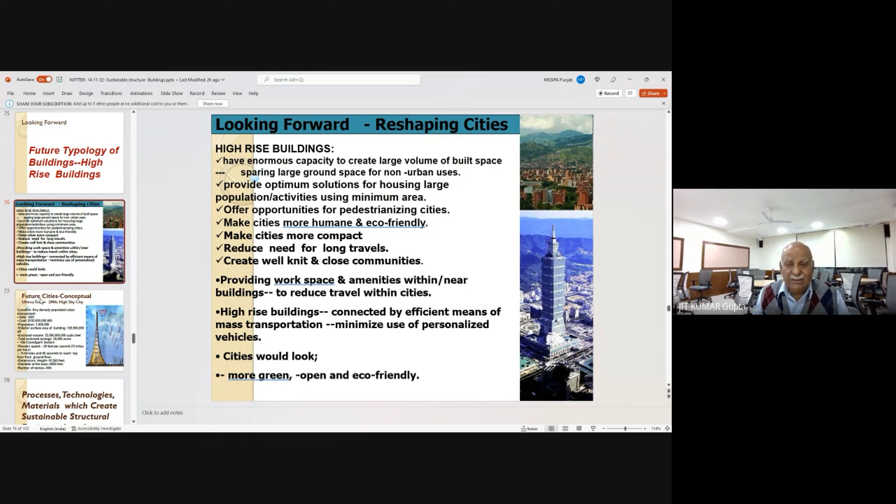Please understand the building typology is changing. Buildings are going to be distinct in years to come. You will have to deal with buildings with larger span, larger footprints, and high-rise buildings. High-rise buildings have their own context because they occupy less space. They provide more space within less coverage of land. So there can be more interaction. Of course there is positivity and negativity, but they have their own advantages because they consume less area, and you can leave large green areas along that, and minimize the transportation need of moving people.

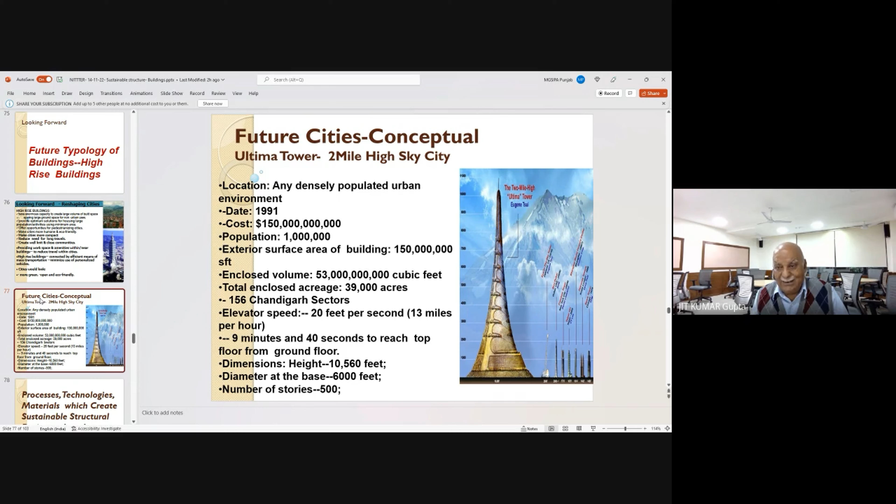But I think in addition to looking at designing a building, you will also look at the material which helps create sustainable design itself. This is number one, how you design.

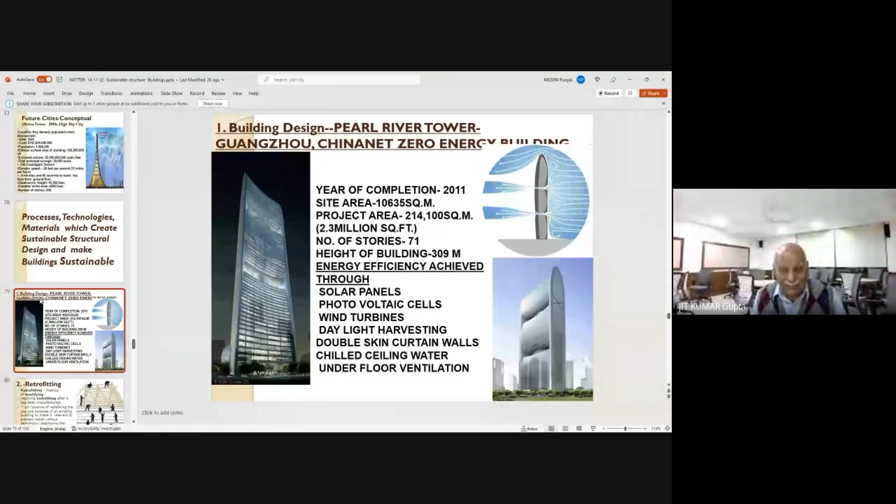So this building remains zero energy. That means, whatever energy this all air-conditioned building consumes, it is producing. So this is done.

Second is retrofitting, what I was talking to you about. So please, when you do retrofitting, you are not allowing a building to be destroyed and demolished. You are only making structural changes. Think how much contribution you make by retrofitting, because you are only strengthening the structural system.

You are only removing the areas which are derelict. You are reinforcing it, but you are not damaging or destroying the fabric of the structure, which would mean destroying all your material, etc.

So this retrofitting, and deconstruction and retrofitting, please include as two subjects of study in all engineering and civil engineering education, so that people understand the value of this and also learn the technique.

And they must be taken to places where the building is to be demolished, and you can give them exercises: how this industrial building can be made into an office building, how it can be converted into a shopping mall itself. And there are examples, people are doing like that.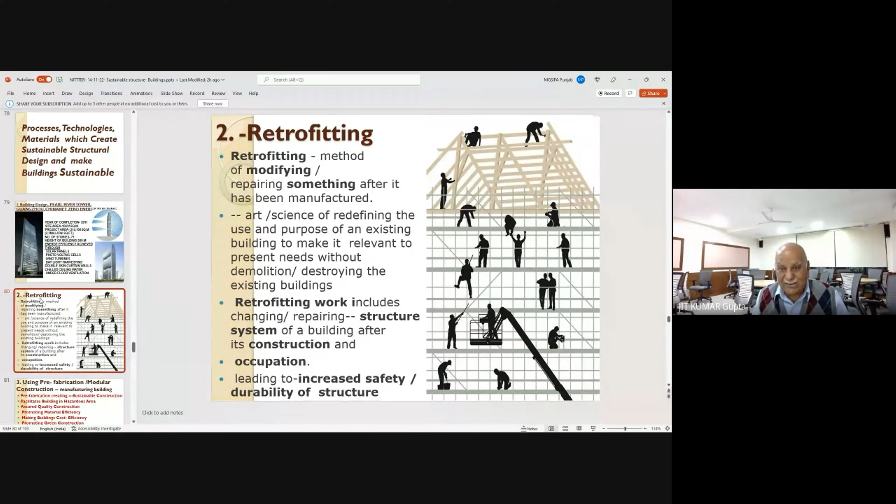Then comes your technology: prefabrication. I think construction has a method of construction. You have to review on site, then take it off site. We need to graduate from construction to manufacturing, because everything cannot be done on site.

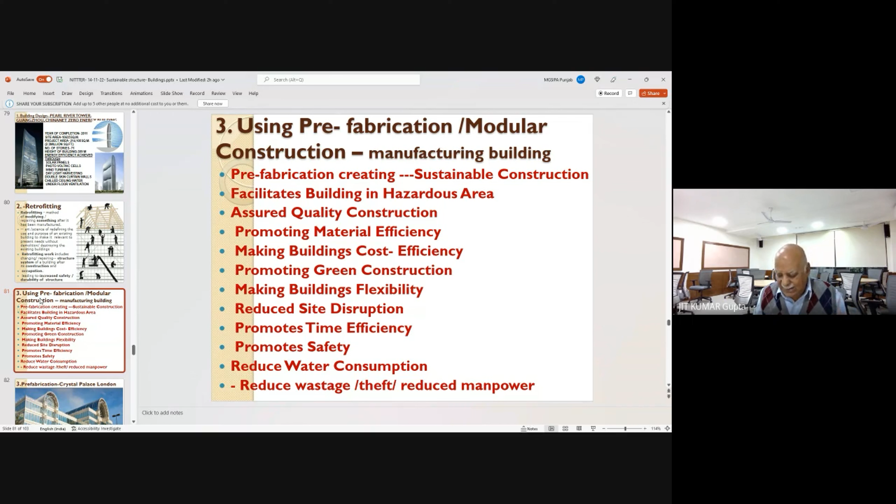The amount of things which are required globally, everybody is doing now modular construction - that is prefabrication. Prefabrication helps you in saving time, saving cost, saving material, saving water, saving against theft, and other things needed. Of course it has limitations, but it has more advantages.

Then, brick remains very, very important. So please use brick in its natural form. Don't paint it or plaster it - once you plaster it, you will paint it. So you can use it very innovatively.

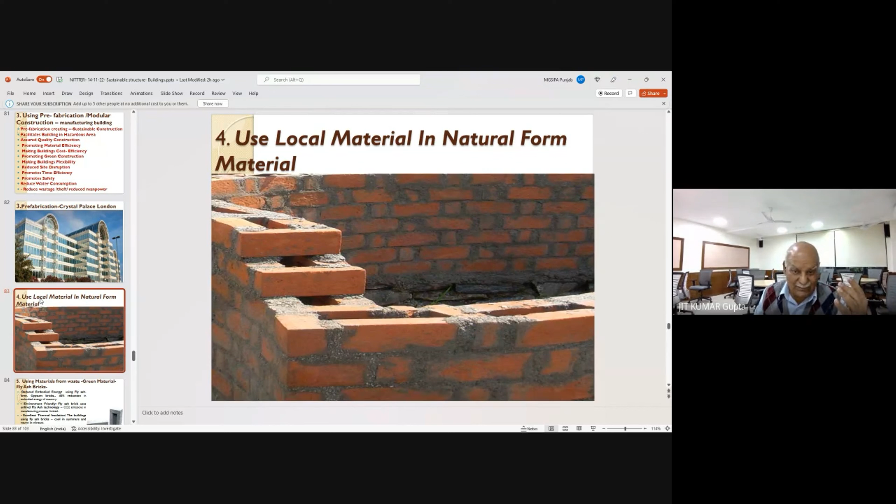This material has much longer life. It's available. It's very useful.

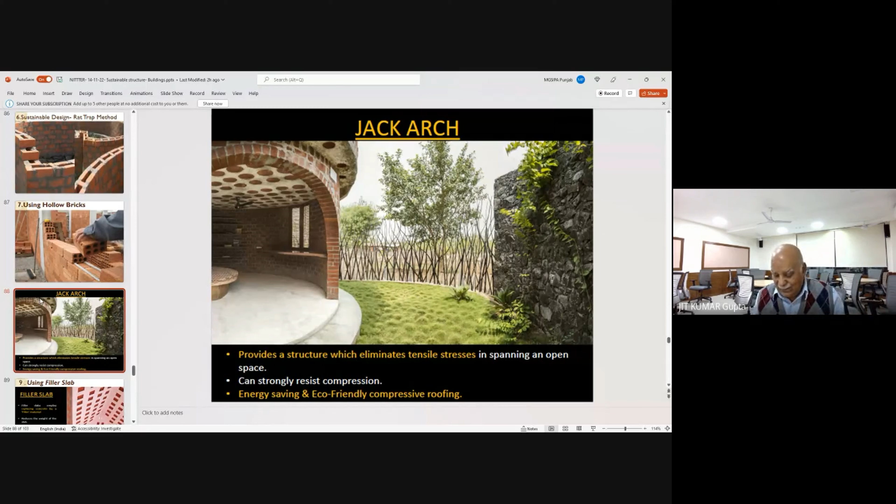Then filler slab is another technology you can use, because you are using bricks where the concrete is there, so lesser steel is required. You have 25 to 30% cost reduction.

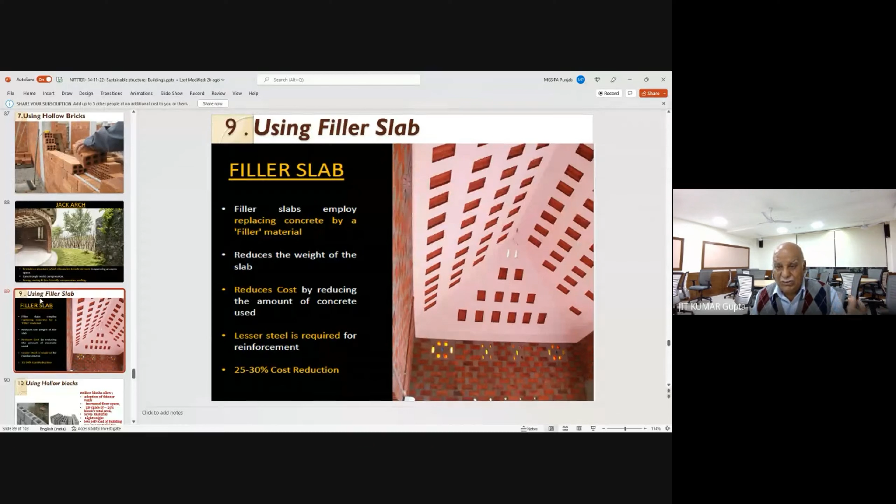And you can reduce the weight of the roof, and also make it more cost effective.

Hollow blocks are 8 inches by 16 inches. You are reducing the width of the wall, which in case of brick is 9 inches minimum. Then you plaster it, and it goes up to 10 inches. So with hollow blocks you have a thinner wall, more floor space, and cavities of 25% of the total area.

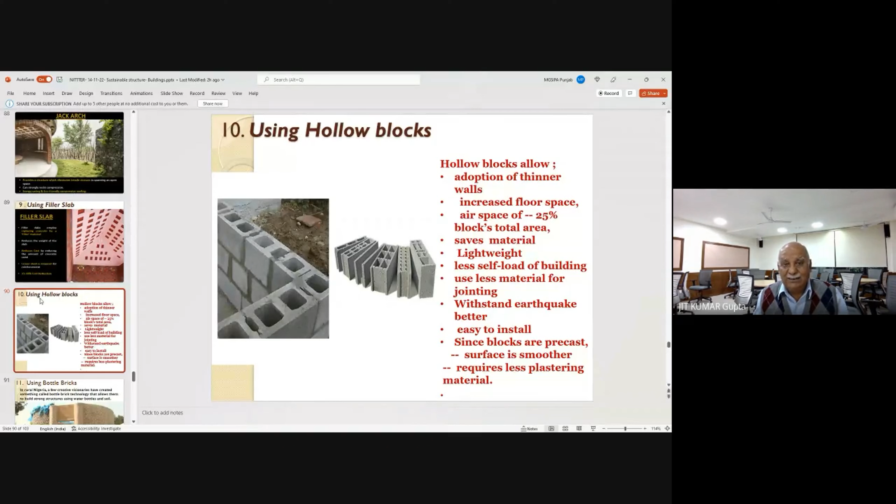Imagine one block is equivalent to 10 bricks, and one brick weighs 3.2 kg, so that's 32 kg, while the block is hardly 22 kg. So you are having less dead load, and they can withstand much more. Then you are requiring less material for jointing and finishes, etc. So I think this could be another option for you to use.

Now people are using bottle bricks. The bottles, steel, plastic, we have bottles, and where do you dispose of them? So you fill them with earth, and use that brick, and you'll find they will never be degraded, they will stay as such. So you are trying to use this plastic for construction, and that makes your buildings energy efficient, also material efficient, and you are using less water.

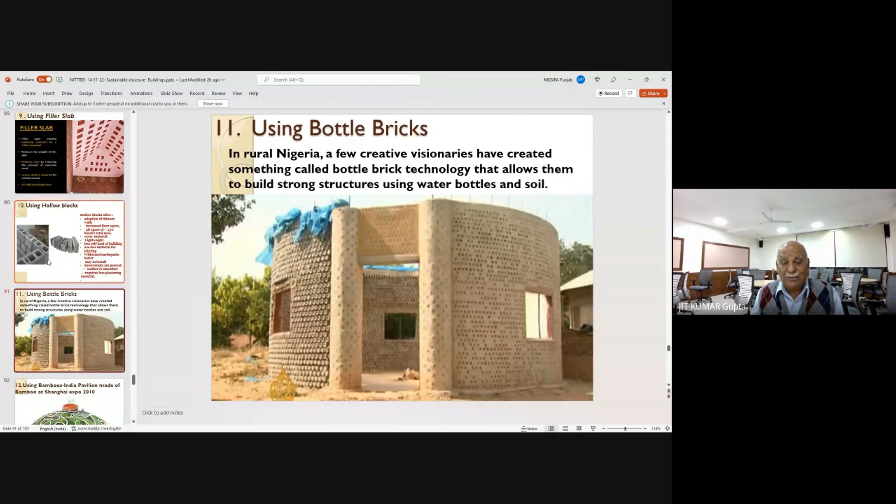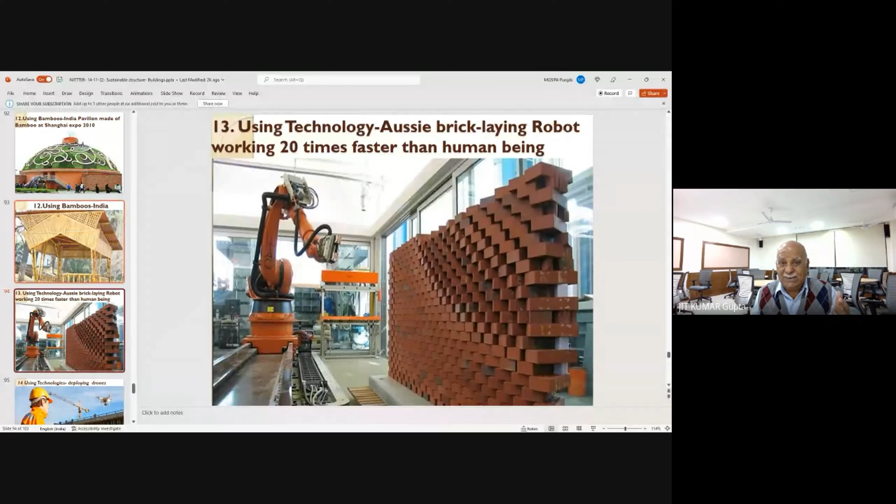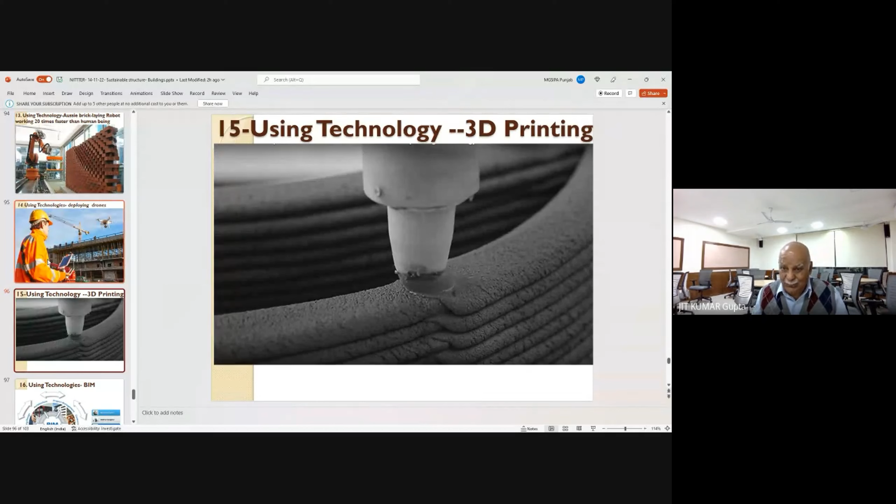This is a machine technology for laying bricks, which lays 20 times faster than a human being, so this is an option. Drones are being used to make building construction more sustainable and eco-friendly, and for monitoring. 3D technology is coming again, which is more resource efficient, time efficient, and cost efficient. And of course you have knowledge of BIM, Building Information Modelling Technology, available to you for monitoring this. In addition to your technology, your intelligence will be very, very important.

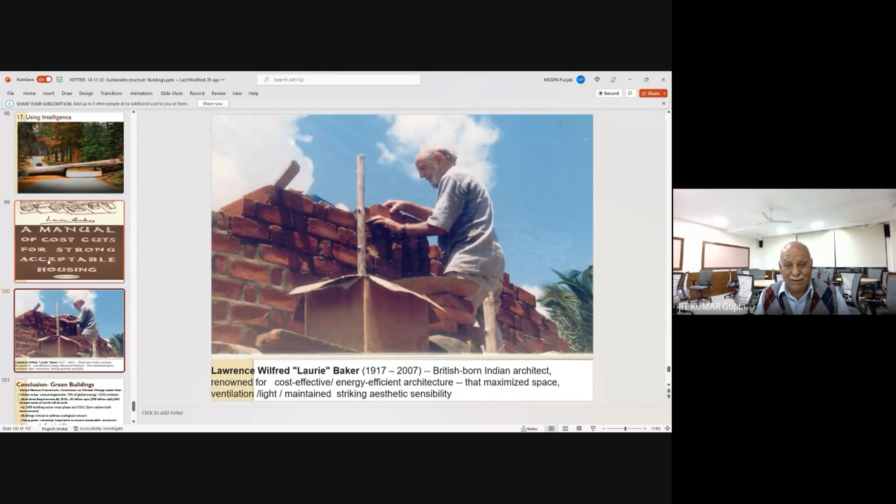I think you can do a lot to make buildings more sustainable. But I would suggest you this book, a manual of cost cuts for strong, acceptable housing, done by Laurie Baker, a British architect who came to India and worked in Kerala. He's known as the father of mud architecture, and he tells you how beautiful a building you can create with brick made locally, using only mud, and it works for poor people. That book is available, and if you want I can share it with you.

But I conclude, I know I may have gone astray, but all the time I'm stressing green building has no replacement. There cannot be any option to have a green building, but green building cannot be possible without a sustainable structural design that has the bones, nerves, which make a building stand. So please understand, we are not yet finished. As per UNO, still by 2030, 60% more buildings are to come in, meaning 900 billion square feet of area is yet to be built.

So it's not yet finished. We can do two parts, retrofitting, but please make sure all new buildings you design remain sustainable, energy efficient and water efficient, and that should be made part of your life, part of your teaching and learning, part of your practice, professional practice, part of education, and surely we can help do it.